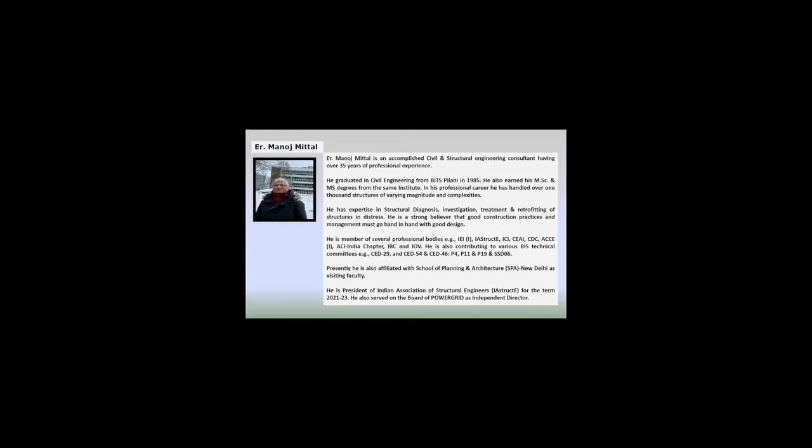I'm really thankful to ICI and Ultratech for inviting me to this lecture. As you know, the topic is structural audit, repair, rehabilitation, and retrofitting of buildings, process, and methodologies. It's a very wide subject, covering a lot of things from audit to repair, rehabilitation, and all those aspects. These things apply not only to buildings but to other structures as well, but my focus today will be on buildings, particularly RCC buildings.

I will try to squeeze this topic into a manageable time frame. I've been given around one hour, so I'll try to cover things within that time, or so, and may skip some slides if required, but essentially I will try to cover most of the important things. My aim is that after listening to this presentation, since I believe the audience includes students, senior students, maybe young engineers, and also other engineers interested in this field,

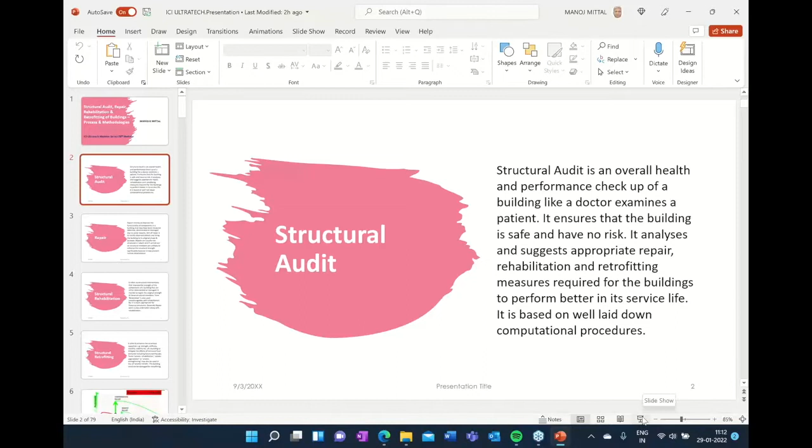Second term was repair - I said structural audit, repair, rehabilitation, and retrofitting. Let's try to understand each term and then proceed further. So what is repair? Repair intends to improve the functionality of components in a building that may have been rendered defective, deteriorated, or damaged due to some reasons. The aim of repair is to rectify the observed defects and bring the building to its original shape and purpose. Usually repairs are non-structural in nature, and if carried out on structural members like beam or column, are unlikely to enhance the structural strength significantly. However, it may prevent further deterioration. So basically repair is not retrofitting - it's just a cosmetic repair, or sometimes repair of a structural element just to arrest or rectify the observed defect. Repair is important, but it is not retrofitting - it will not enhance the structural capacity of the structural members or the building itself.

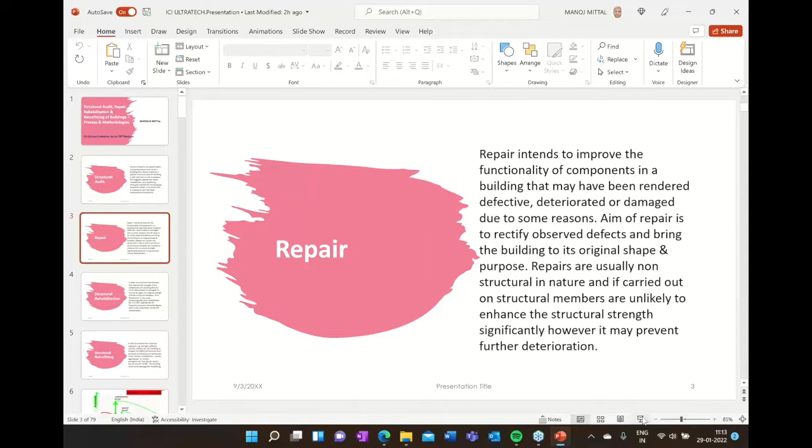So now what is structural rehabilitation? It refers to structural intervention. Yes, structural rehabilitation is a structural intervention - repair is actually not a structural intervention. Structural rehabilitation is a structural intervention that improves the strength of the components of a building that are either deteriorated or damaged. It intends to regain the original strength of these structural members. For example, there is a column or a beam whose strength has deteriorated over a period of time - probably we can do structural intervention to bring back the strength of those elements to the original required strength.

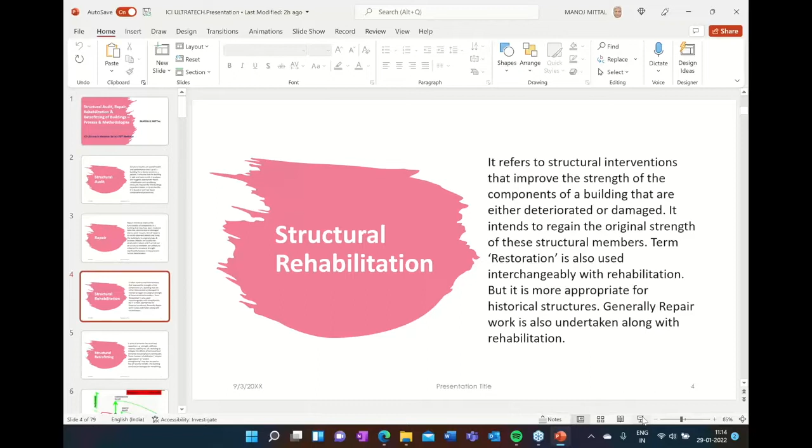Sometimes we also use the term restoration in place of rehabilitation, but restoration is more appropriate for historical structures. Repair work is also sometimes associated with rehabilitation. So repair is generally cosmetic repair and will not increase the structural strength of an element, component, or building. But structural rehabilitation is a structural intervention which tries to improve the strength of the structural member to bring it back to the original level. So that is structural rehabilitation.

Next term is structural retrofitting - this is the most important term. It aims to enhance the structural capacities - for example strength, stiffness, ductility, stability, etc. - of a building to mitigate the effects of increased load demands, including future earthquakes. Terms like seismic rehabilitation, seismic upgradation, or seismic strengthening may also be used in lieu of seismic retrofit. The building need not be damaged for retrofit. So basically retrofitting is a slightly upper level thing where we are trying to upgrade the building, trying to improve or enhance the structural capacities of our structural members. Generally we do structural rehabilitation or repair when the building is damaged or some defects or cracks are observed.

But even if you do not have any apparent distress sign in the building, you still do retrofitting to upgrade it to the desired standards. Maybe the IS code has changed, standards have changed, provisions have changed. You want your building to comply with the new standard, so you do the retrofitting.

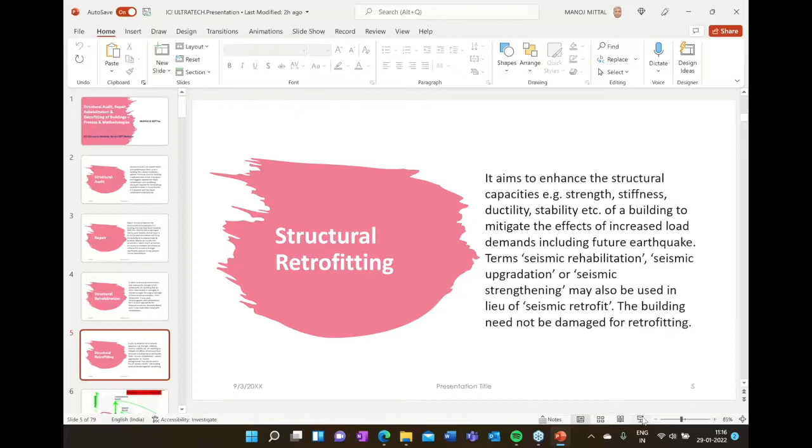If you are doing retrofit at a later stage, it will still improve the performance, but it will be lesser performance than if you retrofit at the right time. So retrofit at the right time is very, very important.

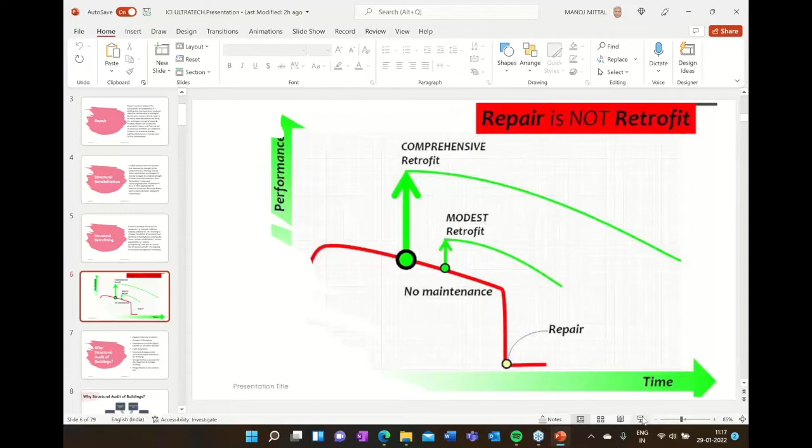Why do we do structural audit of buildings? Apparent distress symptoms, quite obvious - if you see any crack in the building, if you see any visible settlement, if you see any tilting or something like that, definitely these are distress symptoms. You will definitely like to go for a structural audit and maybe a retrofit or rehabilitation.

If the occupancy has changed - a residential building changed to a commercial building, or a commercial building is being used for some heavy loading or something - probably you will like to get it checked whether it is safe to use that building for the different occupancy.

If some damage has occurred due to earthquake, fire, blast, cyclone, or any other accident, probably then you will like your building to get audited, whether the building is safe for occupancy or what kind of repair, rehabilitation, or retrofit is required.

Similarly, if your building has been designed and constructed as per previous codal requirements and the code requirements have changed now, probably your building may not be complying to the new standards. You may like your building to be checked or audited, whether your building complies to the new standards or not, or what inadequacies exist and whether something needs to be done.

Sometimes structural changes or horizontal or vertical additions in the building might have occurred. Some user may have done additions in the floors, or some horizontal expansion may have been done. So you may like to get it audited to check whether these additions or alterations done in the building are safe or not.

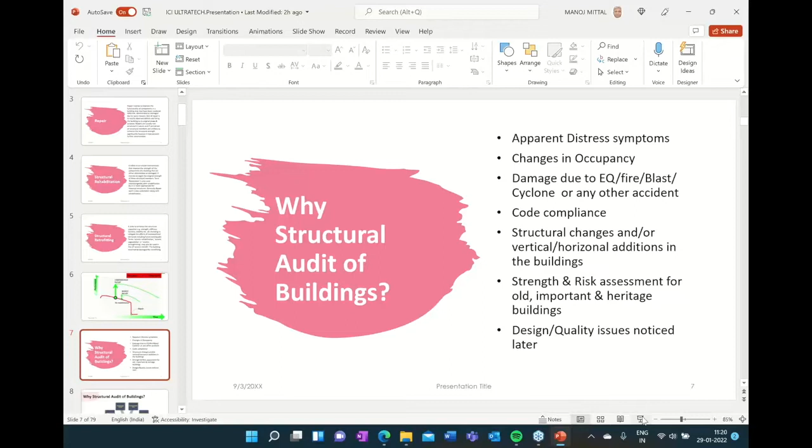So basically, when we talk about a building or safety of a building, there are various factors: the material used in the building - masonry, concrete, or steel - what architectural shape or size has been adopted, what is the location of the building, what kind of soil and site geography is there, whether the structural design has been done correctly, what construction techniques have been used, whether the building has been designed and detailed properly but not maintained properly, and periodic maintenance has not been done. All these things make the building vulnerable, so structural audit is required for such buildings.

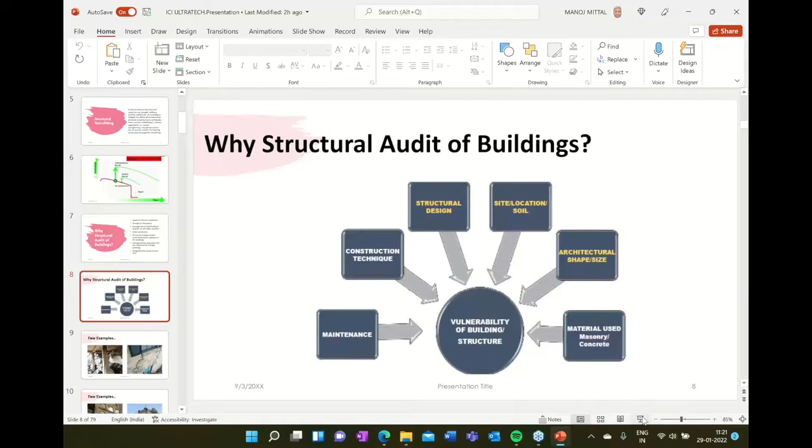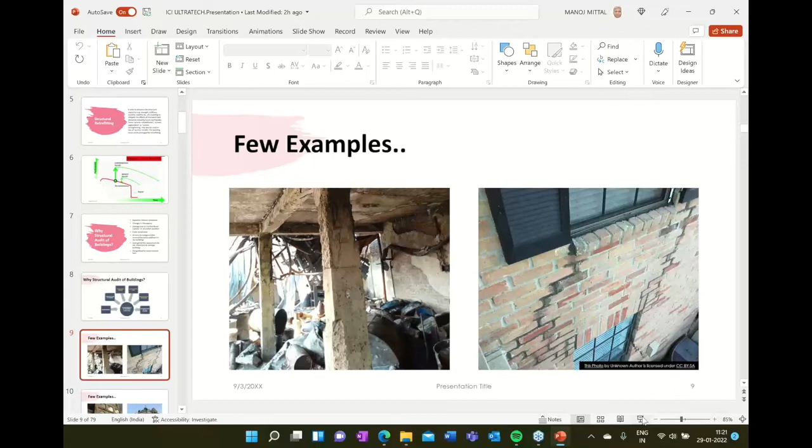So these are some examples you must have seen - everybody must have seen so many distressed buildings. You can see some pictures here. The first left-hand side building is damaged by fire - this was somewhere in Ghaziabad. On the right side, you will see the cracks in the building. You can find several examples of distressed, damaged buildings.

So now I will focus - once you have seen what structural audit, repair, rehabilitation is, and why we need structural audit of a building, now how to do it? What is the process and methodology to do the structural audit of a building? First, I will cover the structural audit, then I will go to rehabilitation and retrofitting strategy and techniques.

This is as per IS code - I'm following IS 15988, and you may refer to it for further detailed study. I believe this is a quite comprehensive and quite good document, and it is quite systematic also, so you can follow it. I generally follow this approach which I am telling you now.

So what do we do when we have decided that you have to do a structural audit of a building? Then there are two stages of evaluation. First one is called preliminary evaluation, another one is called detailed evaluation. When we do preliminary evaluation, if my building passes this evaluation stage, then probably we say we do not need detailed evaluation. Suppose our building does not pass through the preliminary evaluation, then probably it will go for detailed evaluation. Detailed evaluation is more computational and complicated, and preliminary evaluation is a little easier but also needs some computation.

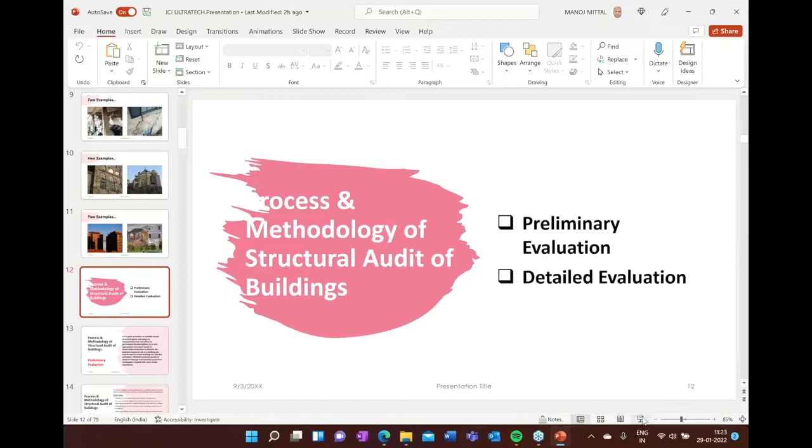It is not that it does not need computation - it will need computation, but not very much. It is an approximate way of doing the thing. So there are two distinct stages: one is preliminary evaluation, then second one is detailed evaluation.

So what is this preliminary evaluation all about? Basically, it is a quick procedure to establish actual structural layout and assess characteristics that may affect its performance and vulnerability. It is a very approximate procedure based on conservative parameters to identify potential structural risk of a building, and may be used to screen for detailed evaluation. So here we are doing screening on whether my building needs to go for detailed evaluation or not, because it is very costly to do the detailed evaluation. It is time consuming, complicated, needs skill, needs technical manpower. So it is not necessary that every building should go for detailed evaluation.

So basically this stage acts as a screening for detailed evaluation. This method is primarily based on observed damage characteristics in previous earthquakes or any other accident, coupled with some simple calculations. So in this stage, you will be doing physical observations of the building, and also some simple calculations. On the basis of this, you will say whether the building is safe or whether it needs to be evaluated in detail.

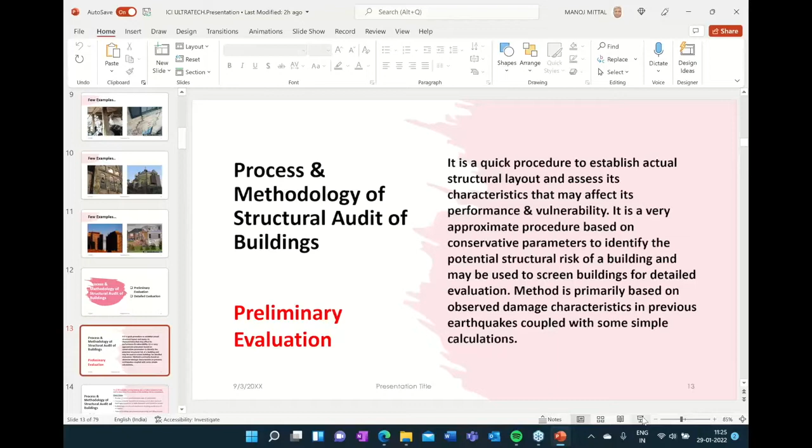So what are the steps in this stage of building evaluation? First stage is the site visit - for anything you need to do the site visit. The purpose of the site visit is to verify the available existing building data or collect additional data, and to determine the conditions of the building and its components.

So basically what happens most of the time is whenever you require to do the technical audit or structural audit of a building, you will ask for structural drawings and other drawings of a building. You will like to have the as-built drawing, not only the design drawing. But as we know, in our country it's very difficult to get the as-built drawing most of the time. But yes, if you get the as-built drawing or the design drawing or architectural drawing, whatever information you get, your aim in the site visit is to check whatever drawings you have, whether the building has been constructed as per the design drawings or as-built drawing, or some changes have occurred.

So basically you will be studying the drawing, you will go to the site to verify, to cross check the building with respect to the drawings available with you. If drawings are not available with you, then you will try to collect additional information - all the missing information from the site.

So what are the checkpoints here? What you will do and what you will check in this stage? Basically, at site, what you will do after going there. You have to check and cross check with the drawings whether the number of stories, dimensions, and year of construction match with the drawings or not. If it is not matching, then you have to collect it from the site.

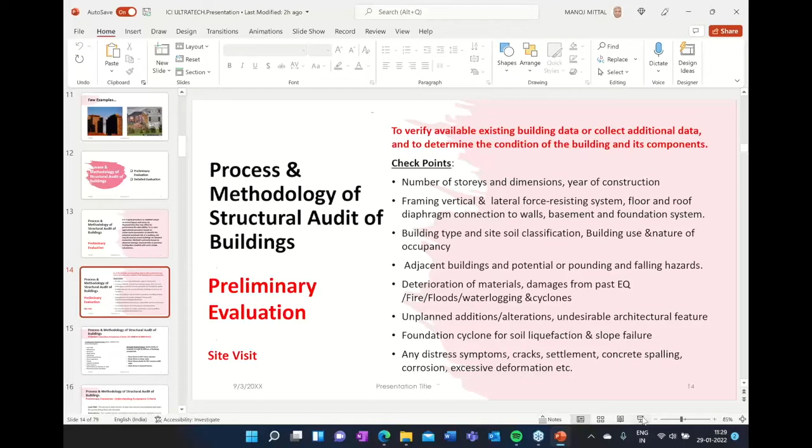And sometimes if you do not have the drawings, you also have to discuss with the owner. Sometimes if the contractor is available or some reliable person is available at the site who was there during the construction, probably you can have a discussion with them. I have noticed that you get a lot of information from such persons when you talk to them regarding the building quality, construction quality, and the procedure followed. You get a lot of insight from such persons, so you should also look out for that, and if possible, try to do that.

So now what do we do here in this evaluation, what is the acceptance criteria? This is given in IS 15988. So basically after the site visit, you have to do two kinds of checks in this stage. One is called configuration related check, the other is called strength related check. So what is configuration related check? Basically here you check the structural integrity with respect to the configuration of the building.

This is basically based on the structural drawings you have, the site visit you have made, the observations you have made, and the data you have collected. If required, you can take photographs also from the site.

So here you have to check the load path. You need to check the redundancy, the geometry of the building, the weak story, soft story, vertical discontinuity, mass irregularity, torsion, adjacent buildings, short columns, deterioration of concrete or steel, mezzanine, loft, subfloors. All those things you have to evaluate, whether any such irregularity or situation is there in the building which you are going to audit.

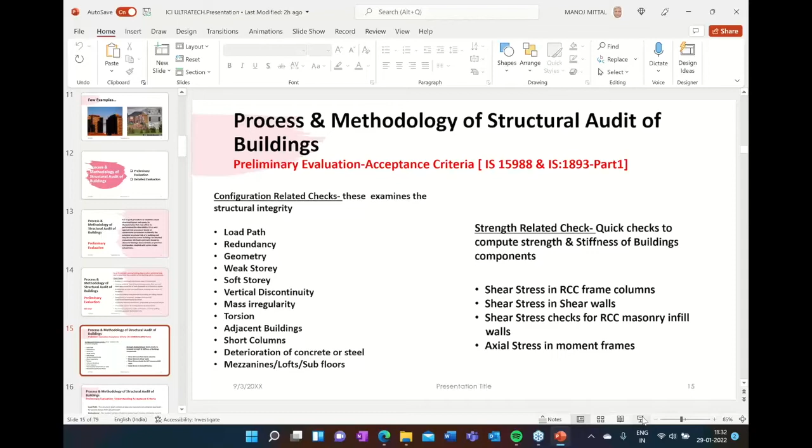Okay, so let's go further into detail. What are these configuration related checks? Let's try to learn more about it.

So the first one was the load path. The structure which you are going to audit shall contain at least one rational and complete load path for seismic forces from any direction, x direction and y direction.

Redundancy: the number of lines of vertical lateral load resisting elements in each principal direction shall be greater than or equal to 2 — there should be at least two structural vertical lateral load resisting elements. In case of a moment resisting frame, the number of bays in each line shall be greater than or equal to 2. Similarly, the number of lines of shear walls in each principal direction shall be greater than or equal to 2 — at least two shear walls should be there in each direction. There can be more than that, and you can check this from the structural configuration of the building, from the drawing, from the site.

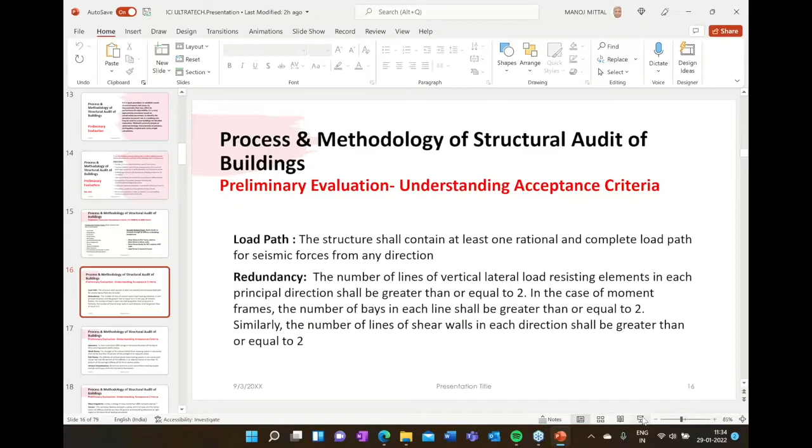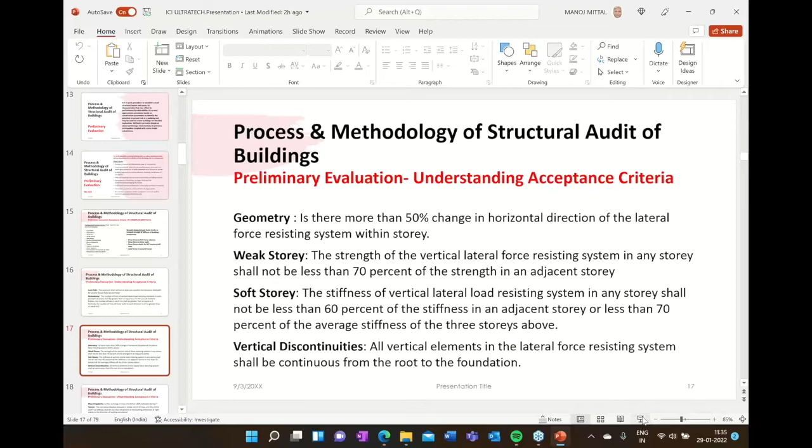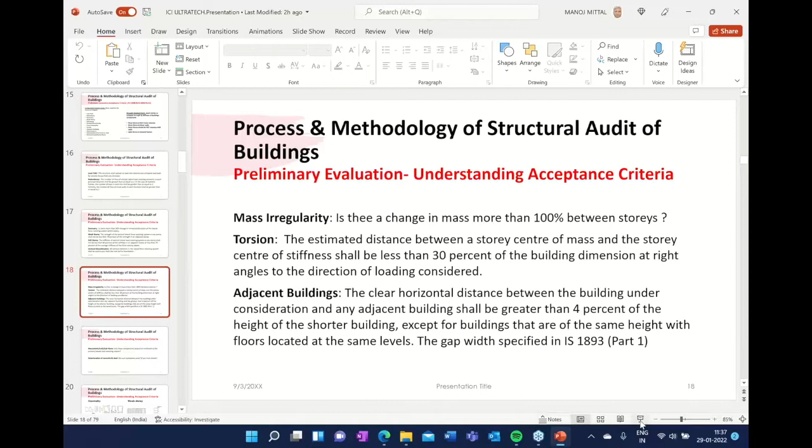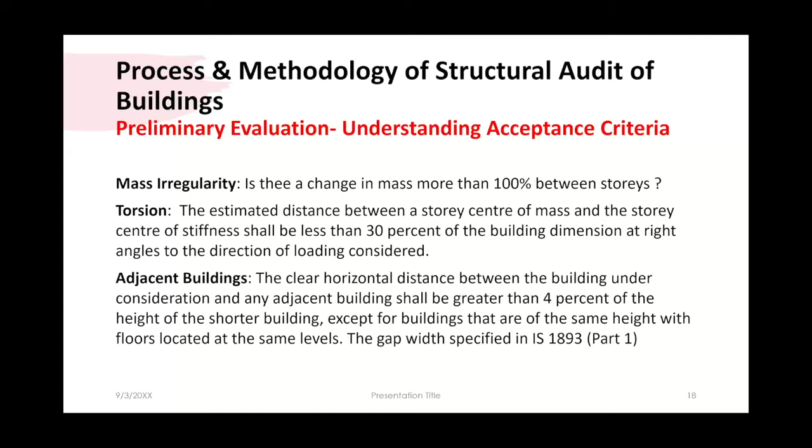Okay, so for adjacent buildings, you need to see what is the distance between the two buildings, so that there is no possibility of pounding. What should be the distance is also given in IS 1893 Part 1, and basically this is very, very important.

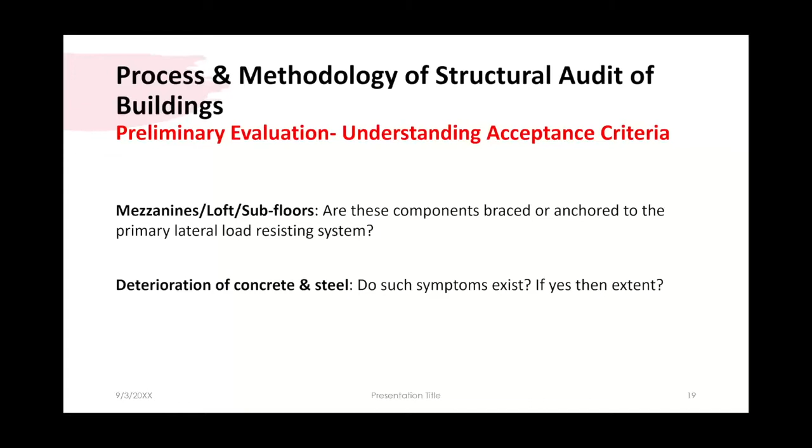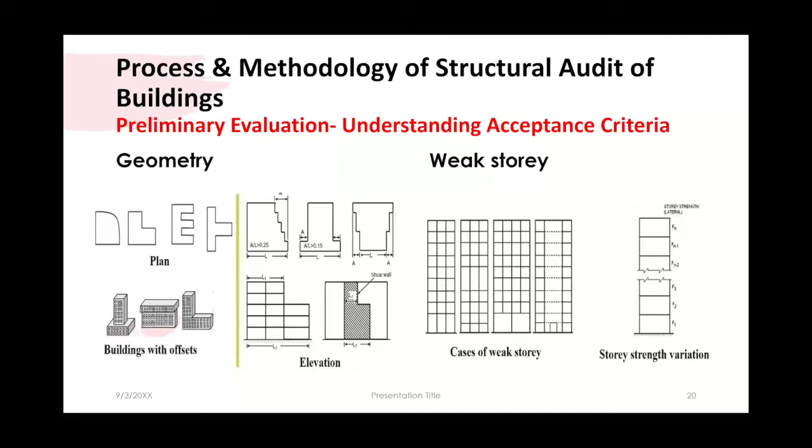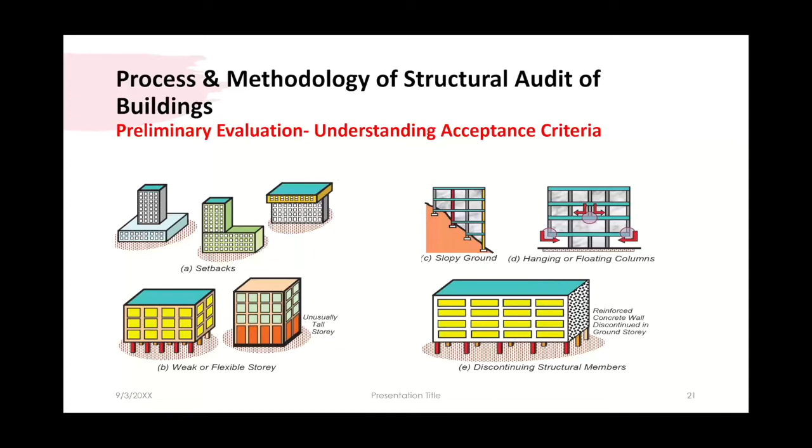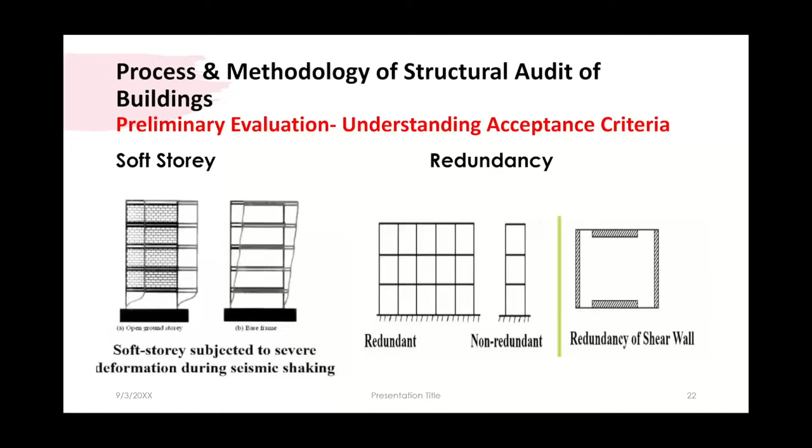Similarly, you can see soft story behavior, with walls above, and redundancy. On the right side, you have a redundant frame and non-redundant frames shown, and you can also see the shear walls. It's a redundancy of the shear walls. You have two shear walls, which I think is the right thing to do.

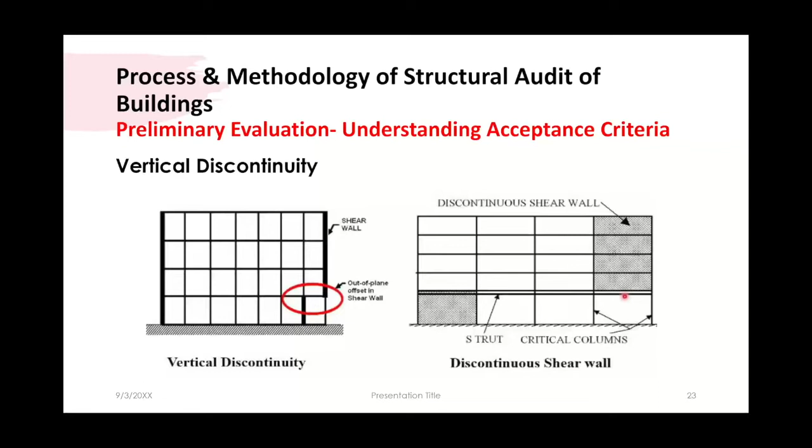Such buildings need to go for detailed evaluation. By just looking, you cannot say that this building is safe. Even if there is no distress sign in your building, no cracks, no visible symptom, you still need to investigate it further.

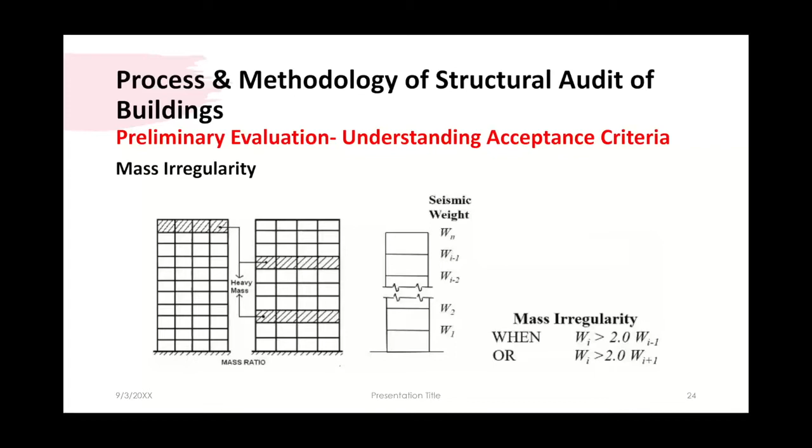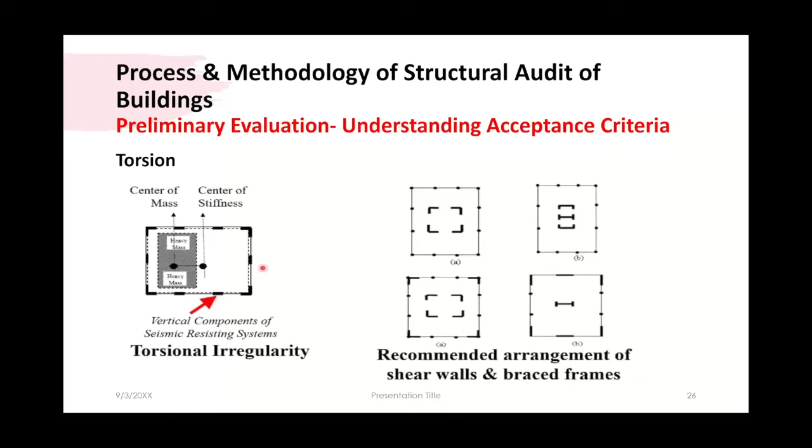On the right side, you see the recommended arrangement of shear walls and braced frames, with a symmetrical arrangement of the shear walls and columns. In a new building, it is very easy to do this, but in an existing building, if you notice such inadequacies, then you need to go for detailed evaluation, and your strategy to retrofit or strengthen it will also depend on these inadequacies.

There is another concept in structural design called the strong column weak beam concept, which is very well given in IS 1893-13920. If you notice that in your building you have very weak beams and very large columns, then probably the strong column weak beam condition looks to be okay. If it is not so, then you need to go for detailed evaluation. The beam must be the weakest link, not the columns.

If a hinge has to be formed, it should be formed in the beam, not in the column. So if during an earthquake some damage has to occur, it should occur in the beam, not in the column, because damage in the column may lead to more serious repercussions than damage in the beams. It doesn't mean there should be a problem with the beams, but this has to be evaluated very carefully. Sizing of the beam and column is important, and this kind of deficiency you can find out during your audit process.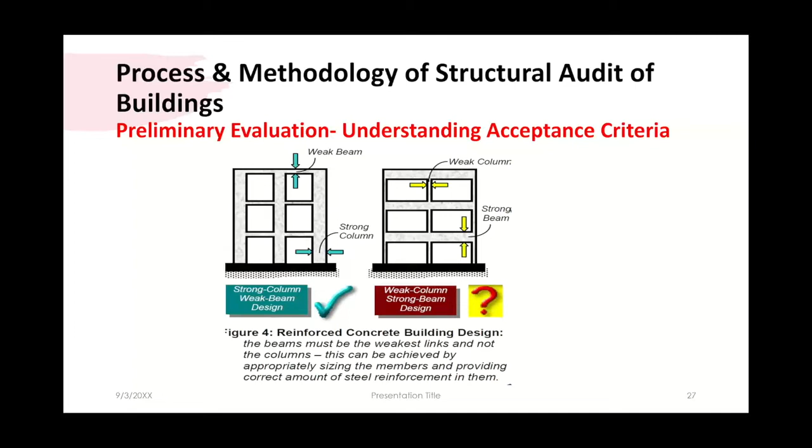Okay, so once you have identified all these configuration-related irregularities and listed down which ones are irregular and whether they are safe or not, for each of them, thereafter, as I said earlier, in the prelim evaluation only, you need to do certain strength-related checks, some simple computations to ensure adequate global strength of the building.

So the first one is the axial stress. You need to calculate the axial stress in the columns of the moment frames at the base. That is F0 by A, where F0 is the force and A is the cross-sectional area of the columns.

F0 is equal to two-thirds VB divided by NF into H by L. This formula is given in the IS code. H is the height of the building and L is the length of the building, and VB is the base shear. I understand all engineers know how to calculate the base shear; there's a formula for that. NF is the total number of frames in the direction of the loading, which you know from the drawing. VB you can calculate, total height H you can measure, L is the length you can measure, and then you can calculate F0.

F0 will be the total axial force, and then you divide it by the total cross-sectional area of all the columns to get the axial stress in the column. This is an approximate way of calculating the average axial stress in the columns.

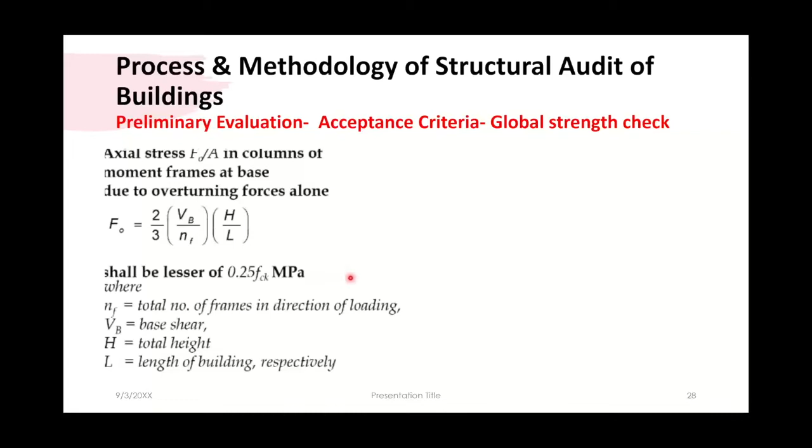Then you also can calculate the average shear stress in concrete columns, tau column. Earlier we checked the axial stress; now you check the average shear stress: NC divided by NC minus NF, Vj divided by AC.

FCK, the characteristic strength, you know. NC is the total number of columns, which you can verify from the drawing or the site. NF is the total number of frames in the direction of loading, which you can calculate. Vj is the story shear.

When you calculate the base shear, you will also calculate the story shear at any particular level, so this shear stress is calculated at a particular story level. AC is the total cross-sectional area of the columns, which you can calculate easily from the drawings or site-measured drawings.

Once you know this shear stress in the column, there is a condition that it should be less than 0.4 MPa and 0.1 root FCK. If it comes within that limit, you say okay; if not, you go for detailed evaluation. These are the quite easy, simple computations in the prelim evaluation of any building.

Similarly, there is a formula given for unreinforced masonry load-bearing wall buildings. Average shear stress equals Vj divided by AW, where Vj is the story shear and AW is the total area of the shear walls in the loading direction. So that also you can calculate if your building is an unreinforced masonry load-bearing wall building.

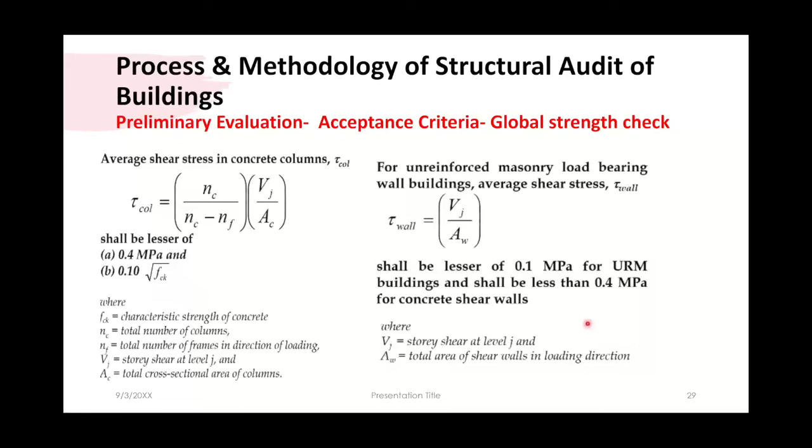So once you have done the configuration-related checks and the strength-related checks in the prelim evaluation, you will go for detailed evaluation if the building fails in prelim evaluation. What does it mean for a building to fail in prelim evaluation? It means it is failing in any of the configuration-related checks or any of the strength-related checks. If it fails in any of these, you go for detailed evaluation.

And further, the code says that if your building is 6-story or higher, then in any case you have to go for detailed evaluation—you will not be satisfied with the prelim evaluation alone.

Similarly, if your building is located on liquefiable soil or near an active fault line, you still have to go for detailed evaluation. Further, if you have a building with inadequate connections or joints—suppose a precast building or something where you have doubt over the adequacy of the joint—then still you have to go for detailed evaluation. So these are the conditions for going for detailed evaluation. I hope I have been able to clear that for you.

I believe many well-designed, well-constructed buildings which are not damaged due to any earthquake or accident probably pass through the first step. And if required, then you will do the detailed evaluation. Now, in the detailed evaluation, since you have already done the site visit and gathered the information, you know what the problems in the building are. Now what will you do further?

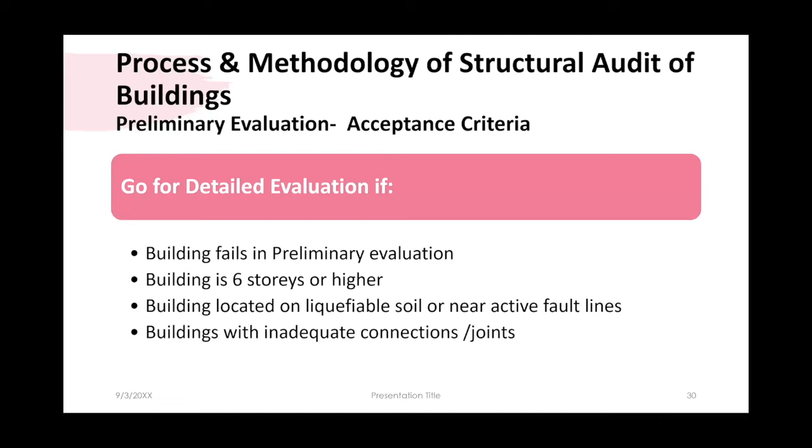In the detailed evaluation, the probable strength of the structural element is determined and compared with expected load demands. Load demands and capacities calculated by conventional means and applicable codes are modified with an appropriate knowledge factor K—I will explain what K is. And then the seismic demand shall be modified with a usable life factor U.

So basically, apart from this, we will also be doing building component checks—checking the deterioration of concrete, cracks in boundary columns or diagonal cracks if they are more than 3 millimeters. For masonry units, you will check the masonry joints. So all those things you will check, and also you will check the building's residual strength of material, which you can determine with NDT and other lab tests.

So basically here you will analyze the existing building by taking the existing element sizes and elements. You will refer to the drawings, but if there is some inadequacy or mismatch, then you will take whatever configuration is available at the site. You will also do NDT and other lab tests to check the residual strength of the materials, and use that material strength in any further analysis.

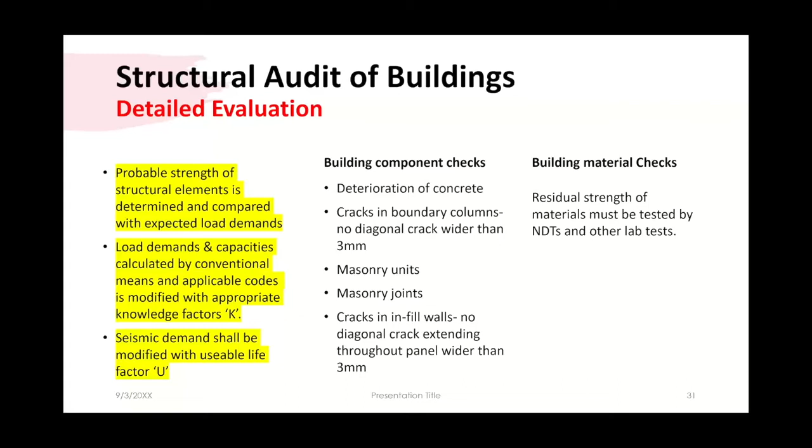Now, this knowledge factor K: many times drawings will not be available to you, or drawings will be available but you will not be satisfied with them. Sometimes inadequate drawings are there, sometimes the drawing may not match the site. Sometimes you may not be able to check site conditions properly for several reasons—the building may be occupied, structural elements may be hidden behind a false ceiling, or there may be limitations where you cannot go and check things. Sometimes testing documents may not be available, sometimes they may be available, sometimes both may be available. So there are several situations you will encounter while doing the site visit and gathering information for your analysis.

So basically this factor K is based on the correctness and reliability of the building information, and it varies from 0.5 to 1. If everything is in perfect shape—you have all the information available, no doubts, all test results available, you can verify and inspect everything from the site—you will take K factor as 1. As situations become difficult, you will start reducing the factor. Suppose documentation is available but no testing of the material is done, or no reports are available, you will take 0.9. Similarly, if you have little knowledge of the details of the components, you will take 0.5. So basically the reliability will lead to factor K ranging from 1 to 0.5. Okay, how you will use that, we will see.

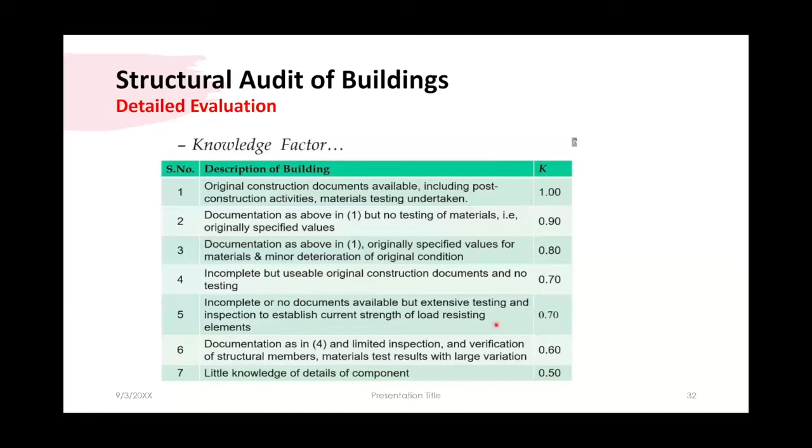This is something, the K factor, that you will apply when analyzing the strength, existing component strength of the building. If you have full reliability, you are analyzing the structure with full understanding, full information, you will not reduce it. If you have doubt, data not properly available, you will reduce it by K. So strength, capacities which you are getting from structural analysis, you will reduce by a factor of K.

Same thing here, you have a factor U, basically for reduced usable life, forces reduced. You know this formula: A equals Z SA/G into T into I divided by 2R. SA/G you know, T is the time period, R is the response reduction factor, I is the importance factor, U is basically the usable life factor.

What is this usable life factor? They say U equals T remaining divided by T designed, raised to power 0.5. T remaining is the remaining useful life of the building, which you have to estimate, and T design is the design life for which the building has been designed. You divide that and raise it to power 0.5 to get the factor U.

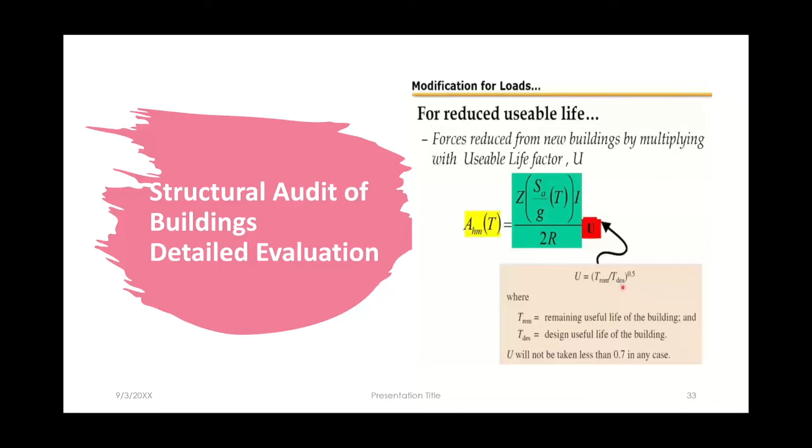That SA/G you can calculate, this formula is given that you know. You can get SA/G, Z zone factor depending upon the seismic zone, and that you know.

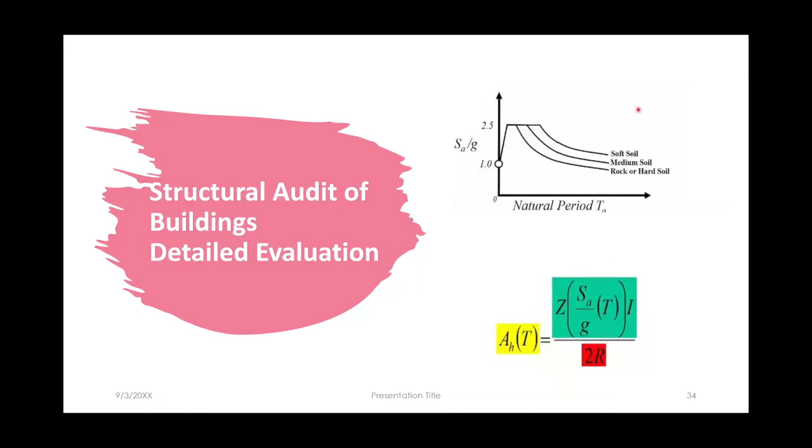So the procedure here is simple, a very simple process. Estimate the flexural and shear strength of the structural members and joints as per standard procedures using applicable codes, modified with the knowledge factor K. You will do the analysis and design process as you do for a new building. Only thing is you are applying a factor K, because you do not have adequate knowledge of the existing structural details.

Then you will calculate the design base shear as per design standards, as per IS 1893 and other codes, and then multiply it by U. Basically, you reduce it by a factor U, which depends upon the remaining useful life of the structure for your analysis purpose. So you are trying to reduce the design force and also reduce the strength of the structural members, then compare them, and perform the linear equivalent static or dynamic analysis as per the standard codes.

The mathematical model must adequately represent the mass and stiffness distribution. That you have to ensure. It should not be that you did the analysis and it is just an academic exercise, not reflecting the correct situation at the site.

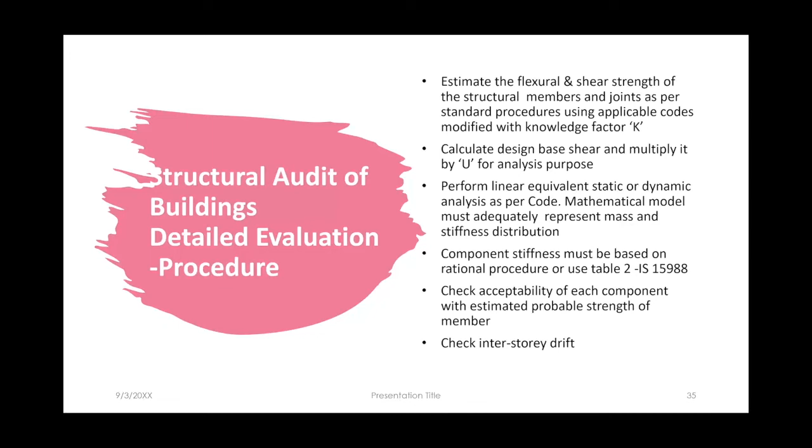So basically when you do this kind of analysis, this is part of the detailed evaluation. When you do this kind of evaluation, you will be able to understand which member in the structural building has inadequacy, how much inadequacy, and what type of inadequacy. That you will be able to find out from this.

After the analysis is done, if all critical members have strength greater than the computed one and drift checks are okay, then it's fine, no problem. If few elements are failing in these checks done by detailed calculations, then you need to do non-linear analysis like pushover analysis, and this should be carried out up to collapse load to ensure that failure of these elements will not lead to loss of stability or progressive collapse.

Okay, so this is a little complicated thing. If you find that structural elements are failing, then you need to do this kind of non-linear analysis. And I believe that most of you need to develop this kind of capacity for non-linear analysis.

Basically, non-linear analysis is where a non-linear relation holds between applied forces and displacement. Non-linear effects can originate from geometrical non-linearity like large deformations, or material non-linearity like elastoplastic material, etc. So these are methods which use non-linear material behavior as well as geometrical non-linearity to determine the structural response.

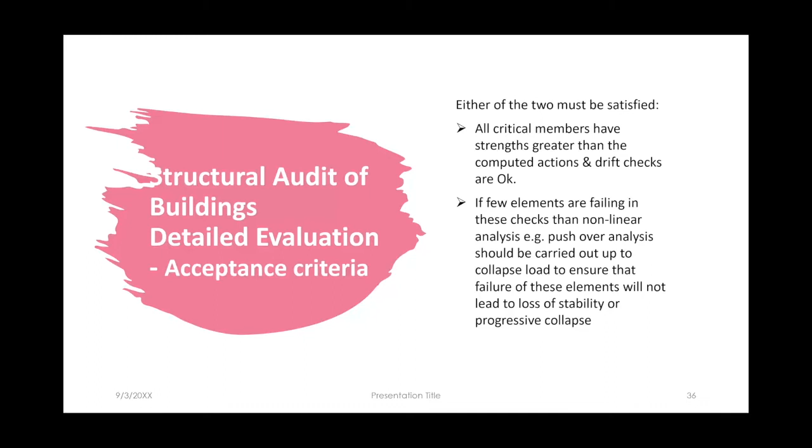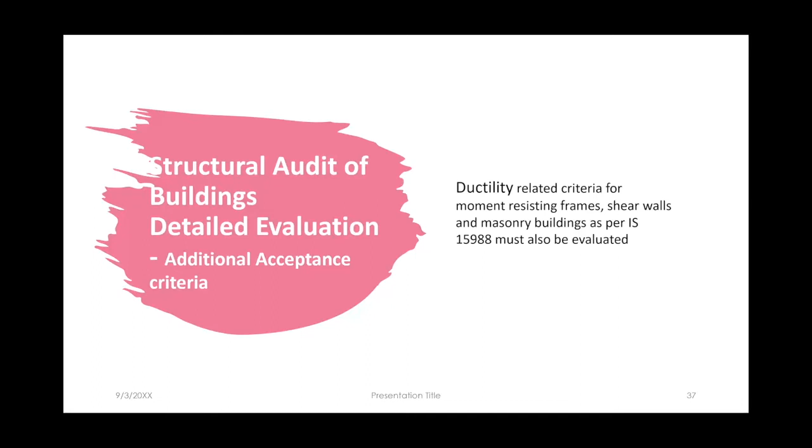And if it is not, then you also have to do some ductility check in your building as per IS 15988, to ensure that your building is adequately ductile. And if your building does not pass through that, then you have to do retrofitting.

Okay, first of all, what did we do? We did the preliminary evaluation by configuration check and simple computation check of axial stress and shear stress. If it passes, it's okay. If not, we will go for detailed evaluation for those buildings - for any building of 6 stories and above, any building located on liquefiable soil, and other such conditions, we will go for detailed evaluation.

And in detailed evaluation, you are checking the residual strength of the member and all those things, and then you are doing the structural analysis, applying factor K, applying factor U, and then checking the inadequacies in the member. If it is okay, no problem. If it is inadequate, then you have to do the non-linear analysis to ensure that it will not lead to progressive collapse. So for doing NDT, I will not cover that part.

Basically, to check the structural condition of the members, you do some NDT and other lab tests. There are various kinds of tests - you can do rebound hammer test, pulse velocity test, core test, pull out test, carbonation test, potential test. There are so many tests available.

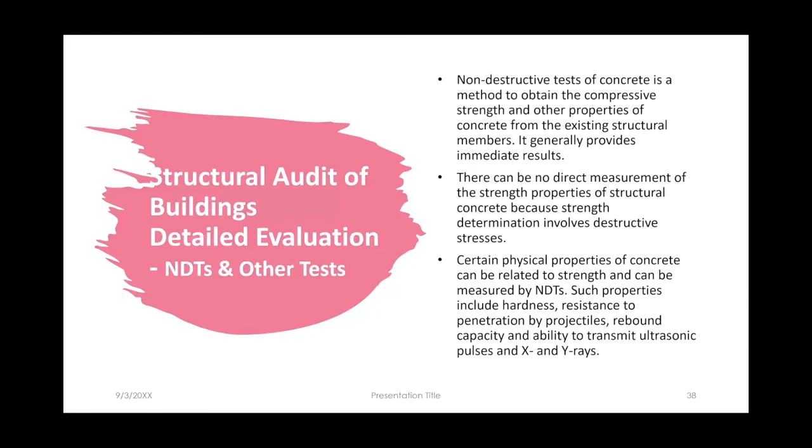These tests are required to understand the residual compressive strength, to check the quality of the concrete and other members, to check the reinforcement, cover, and all those things. These are all different subject matters, so I will just mention them, but you must know about these tests, as they will be required as part of a structural audit. I'm not going into detail of these tests.

There are various tests available, and there is very good documentation on it. You also have the CPWD handbook, which gives a lot of information, and various BIS codes are also available. But the thing is, with these NDTs and all those things, you should be very careful, because this is very tricky and may be unreliable. They are very approximate, a very indirect way of checking compressive strength and other parameters. They are indirect tests, so you need to be very careful where to do them, how to do them, and how to interpret them.

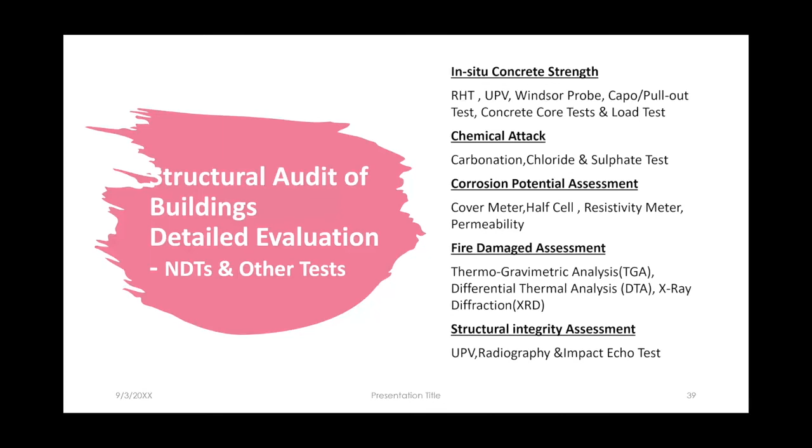Once you have done the structural audit, you have found out what are the inadequacies. So now your next step is probably the structural rehabilitation and retrofitting.

What are the strategies for retrofitting my structure? One thing could be that I have found several columns and beams which are inadequate. So what should I do? Should I start strengthening all those elements, all those columns, beams, or foundation? Probably that is not desirable, because strengthening all the columns, all the beams, all the slab is not possible, not desirable, and not required either. So what should be the strategy?

The first strategy may be strengthening at the member level. Suppose your building has sufficient strength and stiffness at the global level, but some members lack adequate strength, stiffness, or ductility. If such deficient members are small in number, you can modify the strength of these members while retaining the others as is. You can do some kind of jacketing or similar technique for strengthening those limited members. So if you have very few inadequate members, jacketing of columns or beams can be a useful strategy at the member level, but only if the inadequate members are limited.

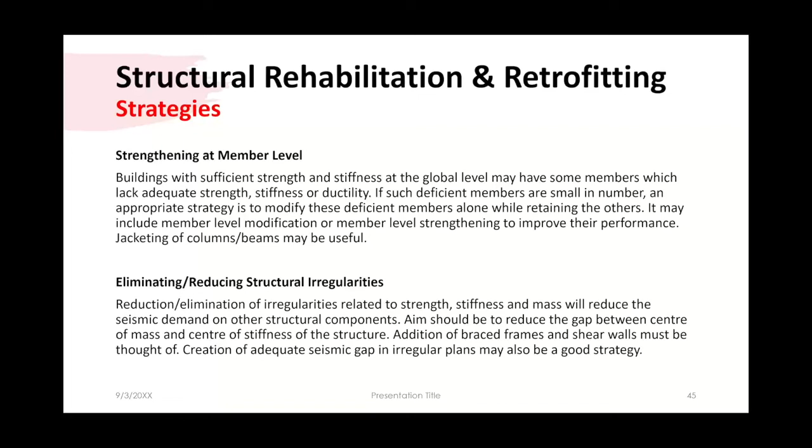Then the addition of braced frames or shear walls must be thought of. Providing an additional shear wall at the appropriate location will improve the structural performance of the building and reduce the seismic demand on the remaining components. This can be a good strategy instead of going for full scale strengthening of all members, which is also not a good thing.

Then there's strengthening at the structural level. If the structure has more components lacking adequate strength and ductility, an effective way may be to strengthen the structure to reduce the overall displacement demand. This may further enhance force demand on some other members, requiring additional strengthening. Braced frames and shear walls are good options here again.

Many times we also think of providing supplemental damping and isolation - base isolation, dampeners, or bracings in the building. These are external interventions, but they must be used very carefully, because base isolation is more effective for relatively stiff, low profile, large mass buildings than light and flexible structures. Energy dissipation helps in overall reduction of displacement and is effective in structures which are relatively flexible. So you need to understand very carefully where to employ these technologies. Yes, these technologies and equipment systems are available, but you have to use them very carefully.

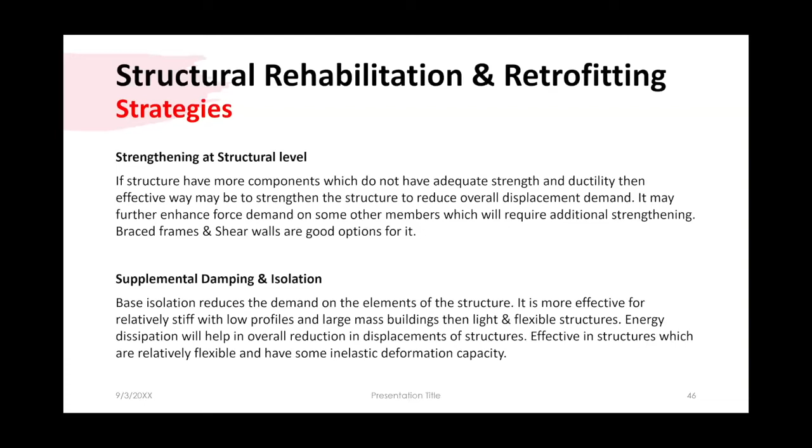So I can show you, these are some pictorial depictions of those things. You can see a building which has a shear wall, and you can see the behavior of a building with a shear wall.

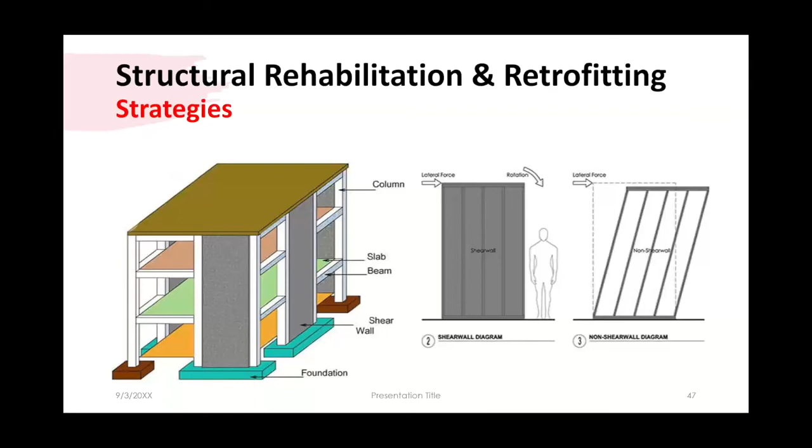It will have less displacement. You can see the lateral force acting at the top, and then you can compare both responses in the adjacent pictures. You can see buildings with various different shapes.

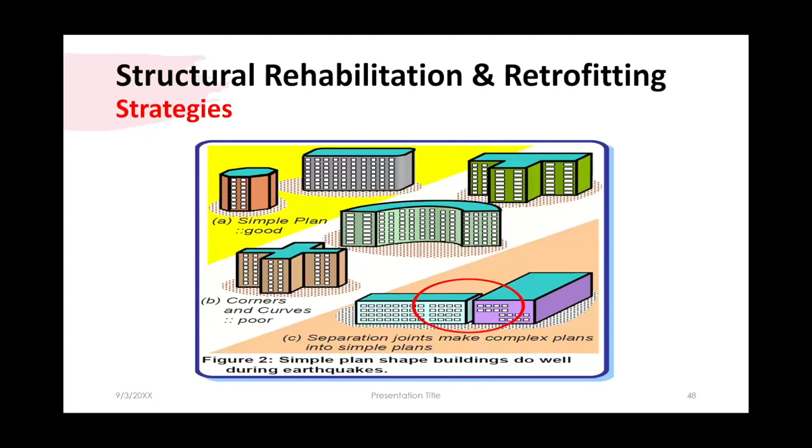If you can make them regular instead of irregular shape, it will definitely reduce the structural demand on the rest of the members. It may be difficult to do this kind of seismic separation in an existing building, but it is possible and may be done in some situations. You must think, if possible, of doing that. These are all different irregular shapes and how to handle them. Probably in a new building you can do that; in an existing building it's difficult.

So this is another strategy. You can, if possible, provide some RCC buttresses from the outside, which will also help in reducing the demand on the existing members. So you will require less jacketing, you will require less of that.

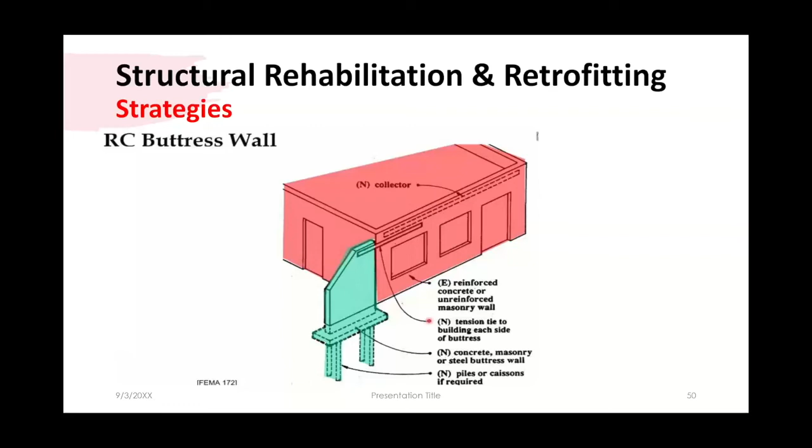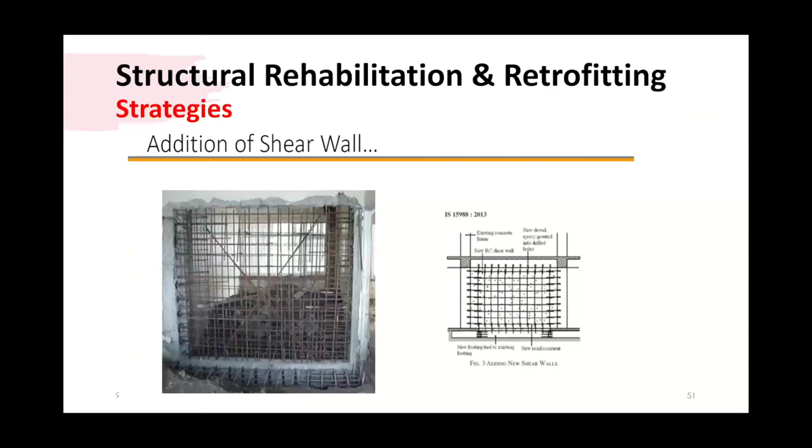Then this is addition of the shear wall. This is very commonly used, and I think it should be used. You have RCC columns and beams, and in between you will be required to construct a shear wall, well designed and well calculated. You can also provide steel bracings in some of the bays at pre-designed locations. So this is a simple thing, and probably it can be done.

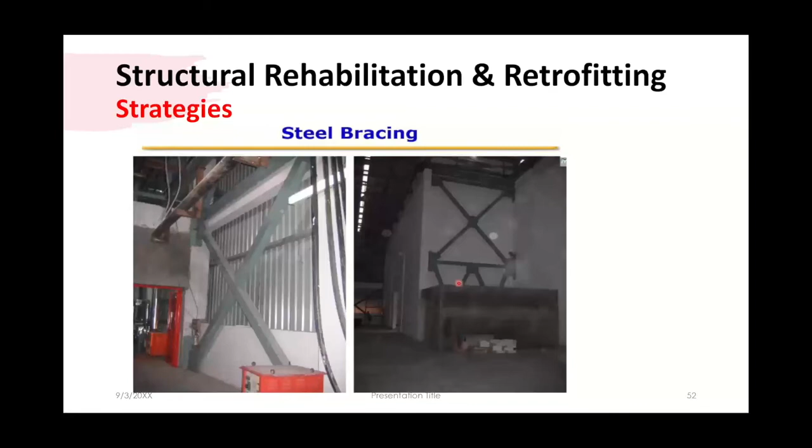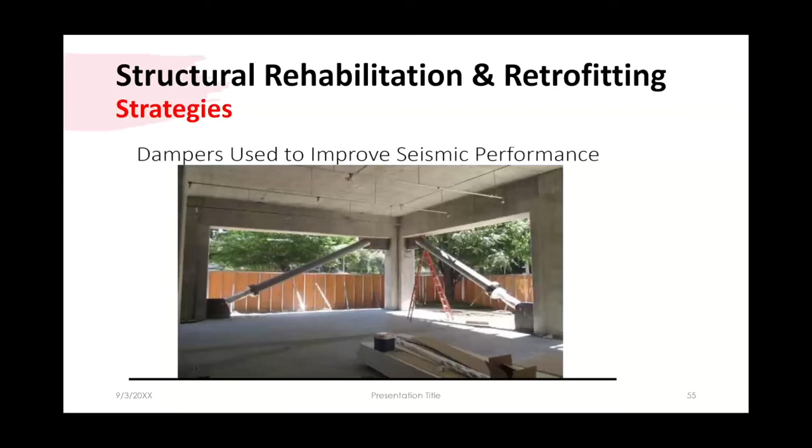This is the actual picture where these dampers have been provided. These are the things which have been installed in the building. Dampers are used to improve seismic performance. If possible, think of such things. This is a very common technique.

Everybody knows this. I think I am running late, I think I have already exceeded time. Okay, I will take a few more minutes and skip some of the slides.

So if required, you will do column jacketing, which is basically the same thing as beam jacketing. You have an existing column, and you provide additional concrete all along all sides of it along with additional reinforcement. The aim is to make the new concrete and the old concrete monolithic with each other, so you provide shear connectors, an epoxy concrete bond, and additional reinforcement. You will do concrete jacketing with micro concrete or maybe normal self-compacting concrete, and the reinforcement has to be calculated. But it is very difficult to do the jacketing at beam-column junctions. It is very tricky and project-specific; it's hard to say what is the best detail, as it depends on the situation and on the innovation and creativity of the structural engineer.

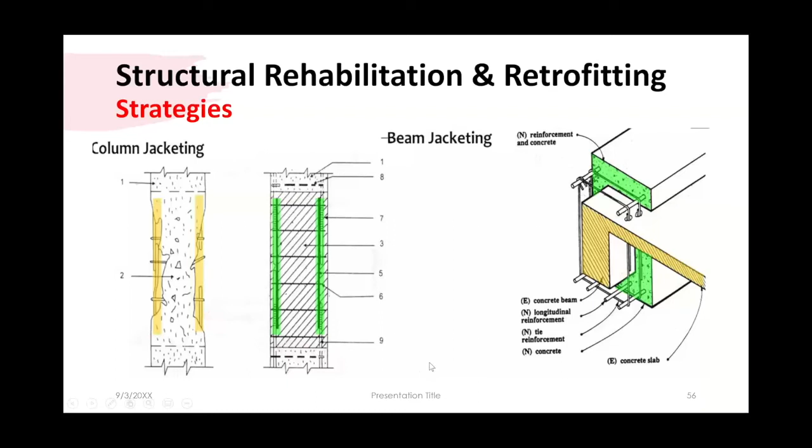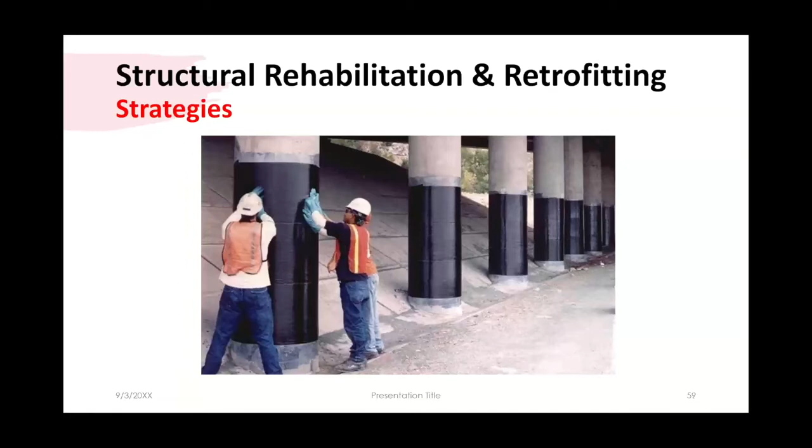Similarly, you can do beam jacketing also. Basically, you are trying to increase the cross-sectional area of the beam or column to take care of additional loads. You can also do jacketing with steel members, both for beams and columns, and you can also do fiber wrapping, which is also a kind of jacketing.

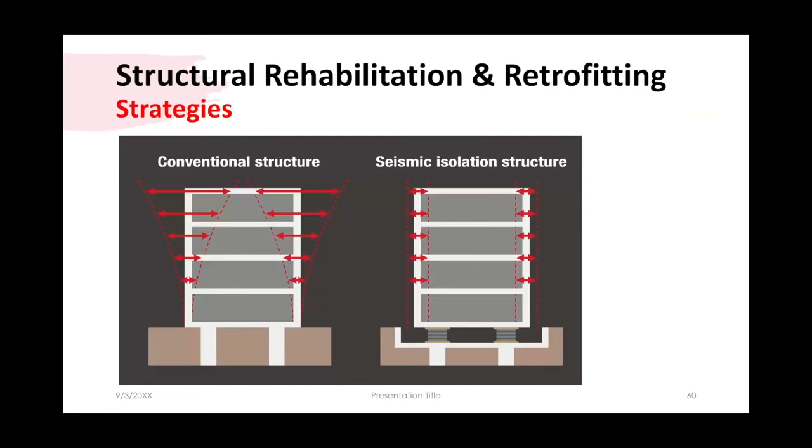So this is base isolation. Everybody knows how it improves the performance of a building, but providing base isolation or seismic isolation in an existing structure may be challenging. It can definitely improve the performance.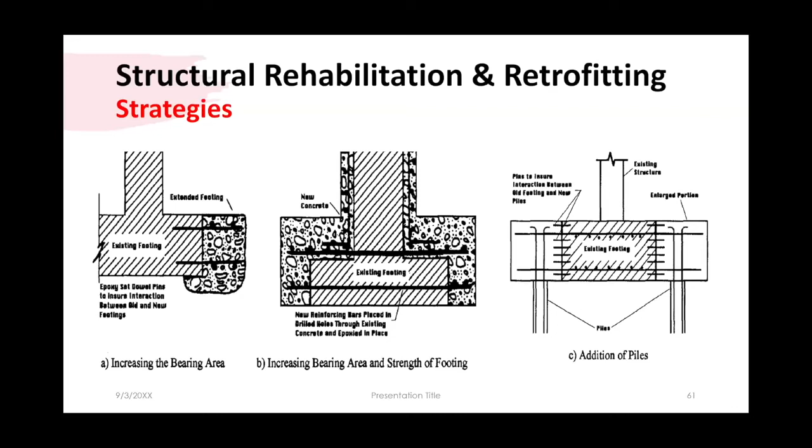This is also strengthening or retrofitting of the foundation system. There can be several ways to do that. Jacketing may basically be RCC, steel profile, steel encasement, or wrapping with FRP.

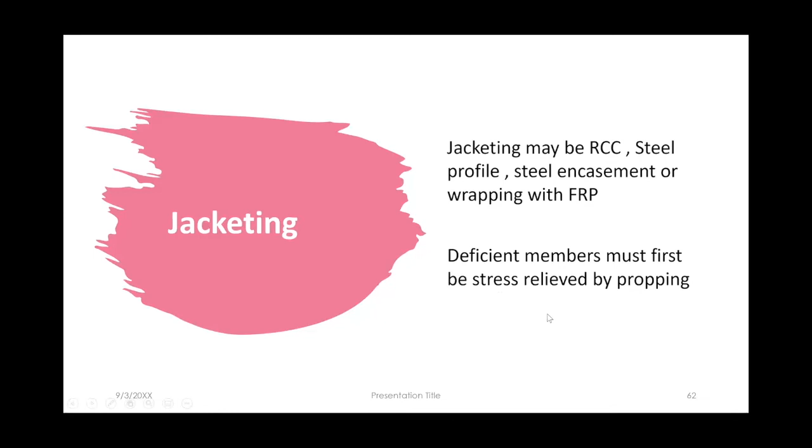For deficient members, the important thing in jacketing is that they must first be stress relieved by propping. You must relieve the structural components before jacketing, relieve them from stress, then do the jacketing, and then remove the prop. This is very, very important; otherwise, it will not serve any purpose. Deficient members must first be stress relieved by propping.

This is a very simple process given in the standards, and most of you might already know how reinforced concrete jacketing is done. The seismic demand on the columns in terms of axial load and moment is obtained. In the detailed evaluation process, we calculate the actual stress and load in the column, and the new moment required as per the modified loads and usable factor. You then calculate the column size and sections for this moment and force, and deduct the existing column size and steel to obtain the amount of concrete and steel to be provided in the jacket.

You will calculate the actual size of the column and reinforcement section required from P and M, the actual force and moment, and then deduct it from the existing size of the column. The extra size of the column cross-section reinforcement is provided in the jacket. Whatever remains, you have to provide in the form of a jacket all around the column.

But you have to increase the amount of concrete and steel actually to be provided to account for losses. How much to increase? Concrete cross-section area AC, you will increase by 3/2 into AC dash, which is the actual value calculated by deducting. That is 1.5 times what is required. Similarly, steel quantity you will increase by 4/3 from what is coming after deduction.

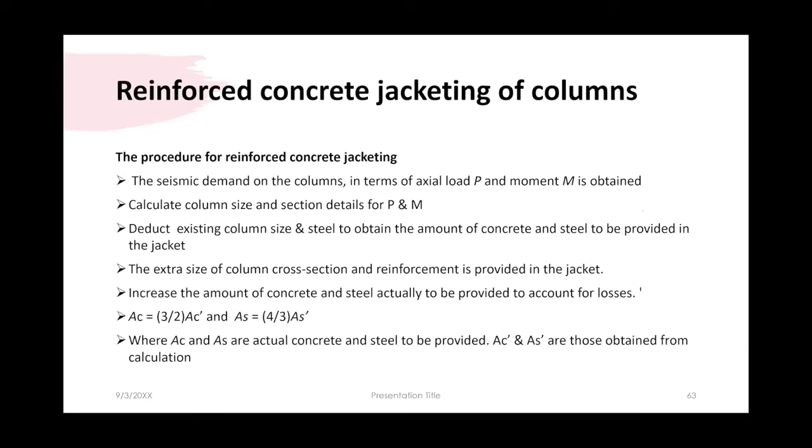And then you can also calculate the spacing of the lateral ties to be provided in the jacket part. S is equal to Fy divided by square root of FCK, into dH square divided by Tj. Fy is the yield strength of the steel, FCK is the characteristic strength, dH is the diameter of the stirrup, and Tj is the thickness of the jacket.

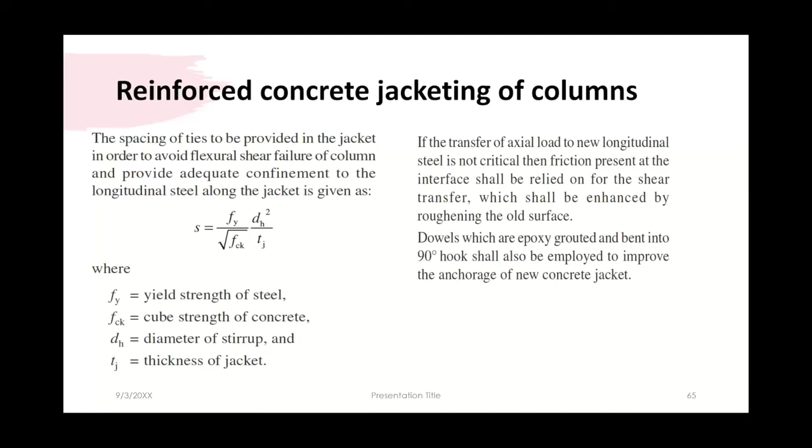So you can calculate the spacing from here, but in any case it is given in the standard. Further, the concrete to be used in the jacket should be at least 5 MPa greater than the existing. Suppose your existing column has M20 strength, then jacketing concrete has to be at least M25. If the existing concrete is M25, then you have to have at least M30 for the jacket concrete.

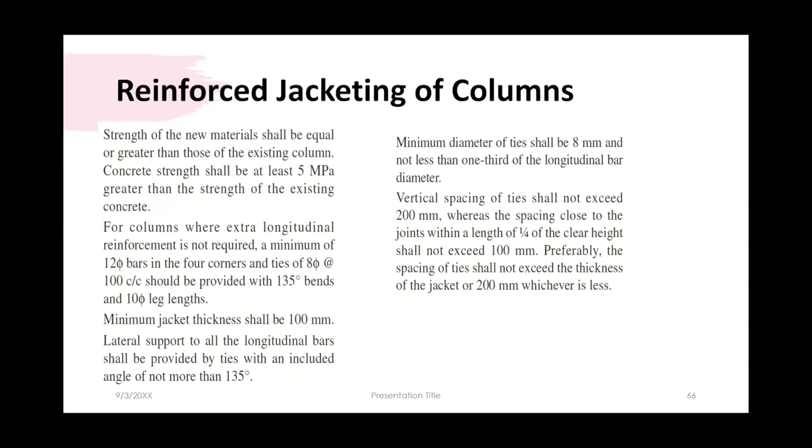And further, even if you do not need any extra longitudinal reinforcement bar as per your calculation, you have to provide at least four 12 mm dia bars at the corner, and ties at 8 mm dia at least at 100 center to center with 135-degree bends. The minimum jacket thickness should be at least 100 millimeters. This is important, and more details you can get in the code.

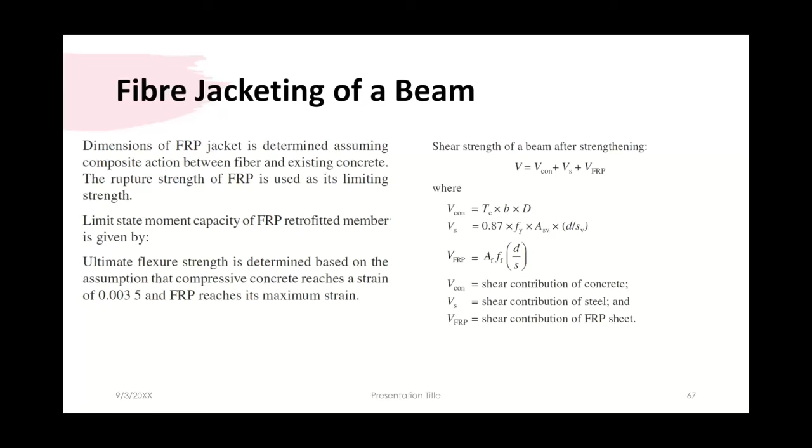I think I do not have time. Similarly, you can provide fiber jacketing of the beam, and you can also calculate the shear strength of the beam after strengthening. It will be the sum total of the shear strength of the concrete, shear strength of the steel, and the shear strength of the FRP. That sum should be the shear strength of the beam in case we are doing fiber jacketing of the beam. It is all given.

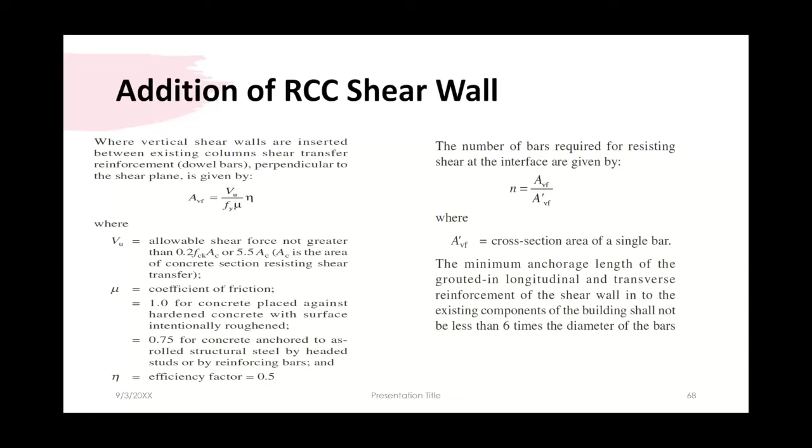Similarly, you can provide the RCC wall, and the details are given on how to calculate the reinforcement required in the shear wall and how to connect it, and also the coefficient of friction is given. So this is all given, you can go through the code for whatever thickness and minimum requirements.

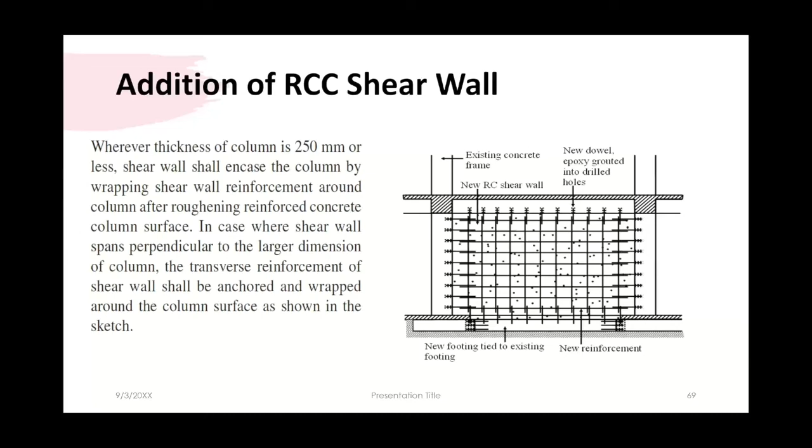It is also very important that when you are providing a shear wall, at its ends there should be adequate size of columns. If the size of the column is less than 250, then probably you need to wrap the shear wall reinforcement jacketing all around the column also. Sometimes that is also required. So all the steel bracing details, everything is given here. I think I will not take much time now.

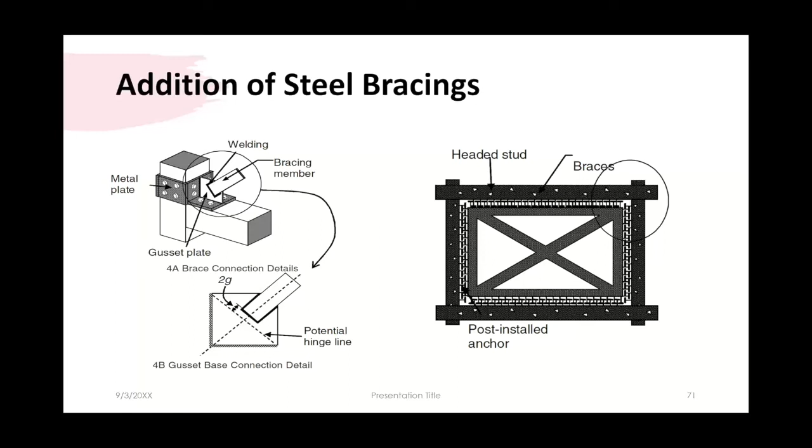But there can be other things also you do while strengthening and doing repair and rehabilitation, like grouting and crack repair. You do injection grouting, replacement of structurally weak concrete, cleaning and passivating the corroded reinforcement, replacement of spalled and delaminated concrete, concrete overlays with normal, low or highly fluid concrete, shotcreting, guniting, shoring, underpinning.

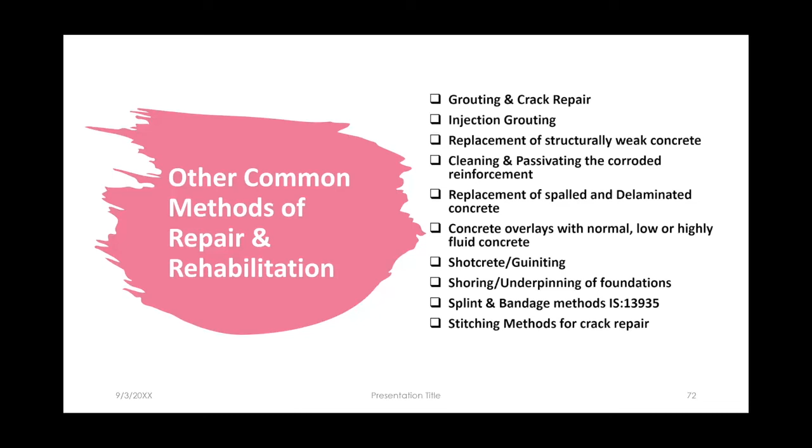For non-RCC buildings, you also can do splint and bandage methods. It is given in IS 13935, I think it is being revised now. And you can also do stitching repair for crack repair. So there can be several things, and I'm skipping all these things, but you can also do this.

So if retrofit or rehabilitation cost is less than 60 to 70%, then you can go for that, except for heritage and historic structures, where cost cannot be a factor. Estimated time required for implementation is also a factor in deciding whether to go for rehabilitation, strengthening or retrofitting, and it also causes a lot of disturbance to the occupants. So ultimately, whether to do retrofitting or not depends on so many factors: the importance of the building, the users' requirements, time, cost, disturbance, and feasibility.

So it depends on many factors. Ultimately, you have to take a decision whether to retrofit or not.

I think I have tried to cover the entire process based on the IS code. Further, I would like to say that doing structural audit and retrofit requires a high level of knowledge and skill. You need to be fully conversant with the IS codes, with the materials, latest construction materials, repair materials, different technologies which have come and are coming. You must also understand the construction technique, the construction process, the construction steps, the quality standards, and you must have an investigative aptitude, so that you can find out what is the cause of the deterioration, what is the cause of the problem, in spite of having very little or unavailability of the drawings or details. You must be able to foresee what kind of problems may be there in the building and why such a situation has happened. You should be able to understand all those things. Only then probably can you do a proper structural audit and retrofit.

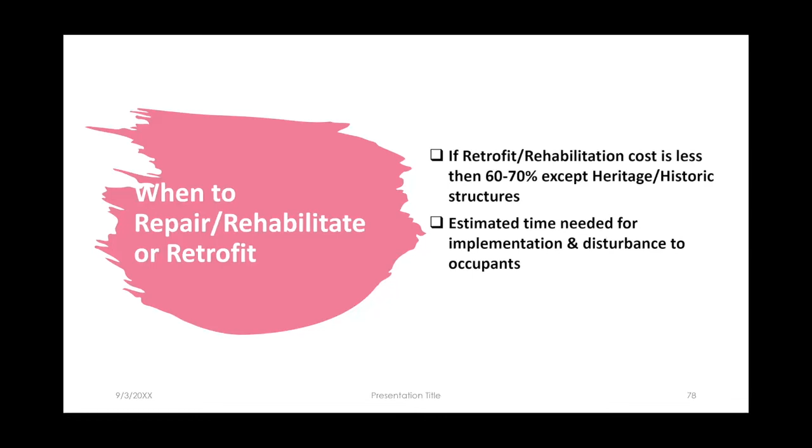So it is a very good upcoming, very desired area, and I will encourage all my young engineers and students to explore it further. I feel it will be very interesting, useful, and rewarding for the country as a whole. So I thank you everyone for attention. I hope I have been able to convey my message.

Thank you, Mittal. Very nice presentation, really we enjoyed it. I think we will all request you to present the second part, the rehabilitation part, separately once again. Okay, no problem, I will do that. Yeah, because you had less time this time, and it is very much required for all structural engineers. So we request you once again to separately present the rehabilitation part so that everyone can understand it well. Yeah, I know, yes sir. Well presented. Actually this was a 2-hour presentation. Definitely, sir. Yeah, because I got some telephone calls from our participants saying this should be done. Later, yeah, we will do. Definitely, sir, whenever you are available. Yeah, definitely, yes. Okay, Bhumika.